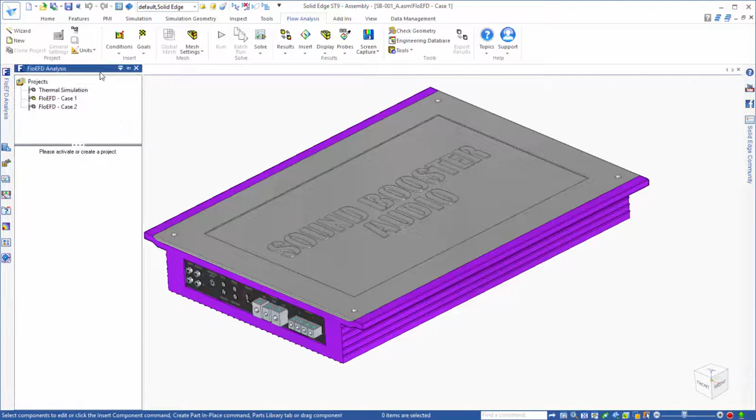What you will see as we set up the CFD problem and ultimately look at the results is that FloEFD ends up feeling like an extension of your already familiar Solid Edge environment, and one of the keys to that is being able to work directly with your native Solid Edge model.

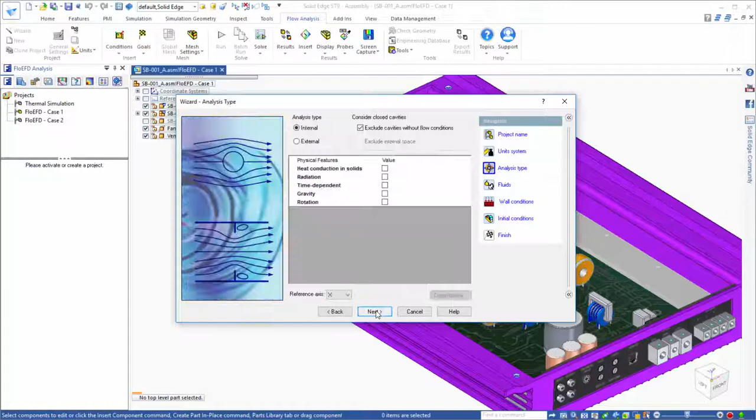A common way to create a FloEFD project is to use the wizard, which serves as a convenient roadmap to guide you through the setup of the basic definition of your analysis.

Once you have completed the wizard, a new CFD project is created in your Solid Edge model. From here, you can complete the problem definition for the analysis you would like to run. This would include assigning items like material properties, boundary conditions, fans, and heat sources.

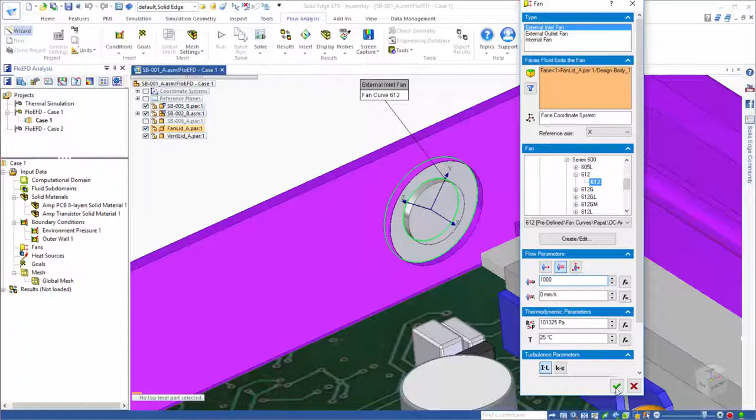These inputs are applied directly to the Solid Edge model by selecting the appropriate faces or parts. This approach is particularly convenient when you need to make adjustments to your CAD model because the analysis inputs are always in sync with your CAD geometry.

Analysis goals are also assigned to the CAD model to extract extra key data of interest from the results. And as a last step of the setup, the mesh inputs can be given.

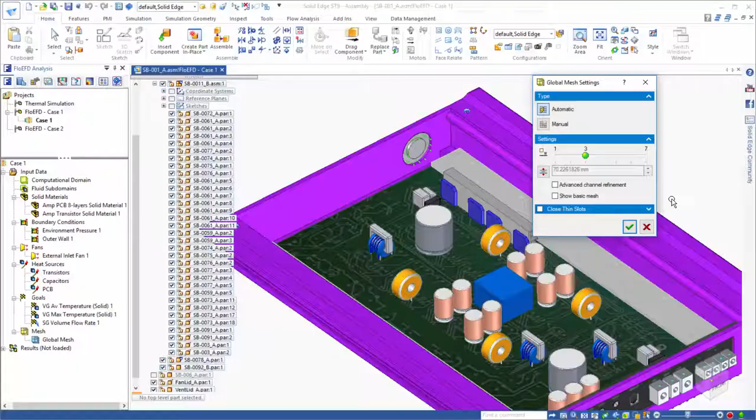One of the core strengths of FloEFD, which overcomes a long-standing bottleneck in the CFD process, is its meshing approach, with the FloEFD mesher handling a wide range of complex CAD geometries easily. At this point, we are ready to run the analysis to obtain the results.

Once the run is completed, we can look at the flow and thermal results on our Solid Edge model. Here, we start by looking at the velocity field on a cut plot, with vectors showing the direction of the flow.

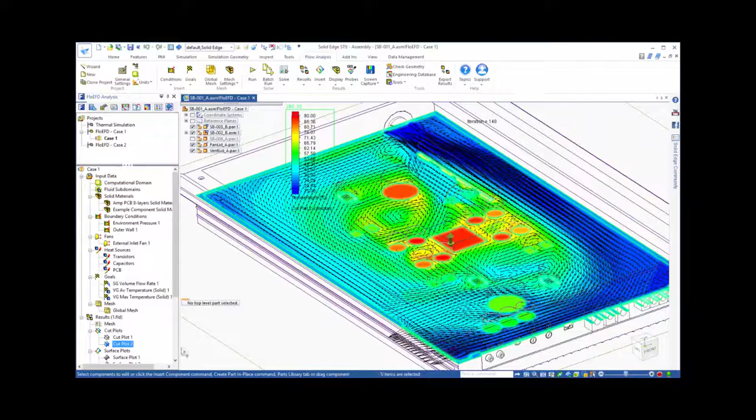The colors show the speed of the air, and we can change the plot to have the colors display temperature instead. Surface plots give us a way to look at the temperature more three-dimensionally.

We can rotate the model to see the temperature distribution, as well as use our probe tool to conveniently extract the temperature at locations of interest.

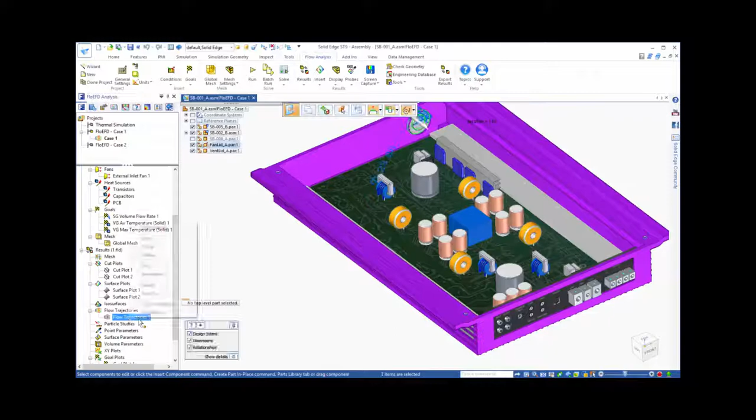Let's also look at the temperatures on the components inside the enclosure. Another powerful viewing option is to look at flow trajectories. These can be animated to give an overall picture of how the air flows through this device.

Notice that with all these viewing options, you can see the CFD solution directly in the context of your Solid Edge model. So in looking at the results from our first case, we want to make some design changes to improve the cooling effectiveness.

And this is where the advantages of working directly with the Solid Edge model drastically reduce the amount of time and effort required to explore the design space with CFD.

One of the ideas that we would like to test based on our first solution is to shift the fan slightly towards the center of the amp.

We are hoping to divert a portion of the incoming airflow more towards the central region of the board to cool those components better, while still maintaining strong flow through the heatsink.

Additionally, we will go ahead and increase the length of the heatsink fins to further help cool the transistors. So we have set up a second family of assemblies member in Solid Edge that reflects these design changes.

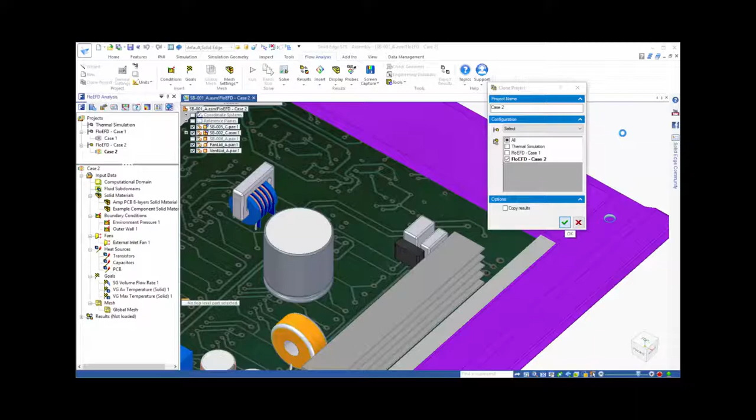Now, all we need to do is clone the setup from our Case 1 project to the new design, which we'll call Case 2. This new case now has the same setup as Case 1, so we are ready to run our next test.

After running the second case, we can look at the solution to see the effects of the new design. Our cut plot shows that there appears to be more flow diverted to the center of the board, and that region appears to be cooler.

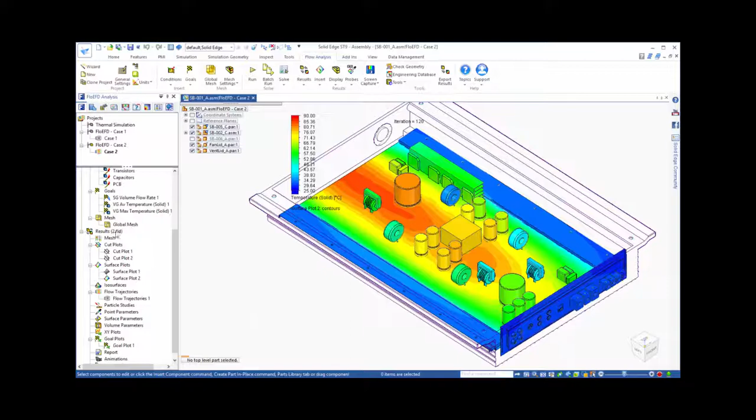We can see the same effect when viewing the surface plot. The Compare tool gives us a convenient way to compare the results from the two cases side by side.

We can use it to compare a variety of results types, like the active scene showing the temperature distribution, or a table of our goals to quantify the temperature of our key components.

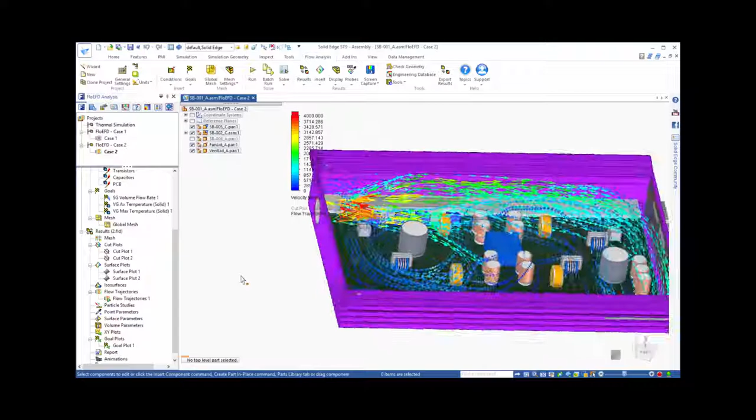This example shows how FloEFD for Solid Edge can be used to improve cooling effectiveness of the design of an audio amp. FloEFD puts the power of CFD directly in the hands of Solid Edge users with an easy-to-use, fast, and accurate analysis tool.